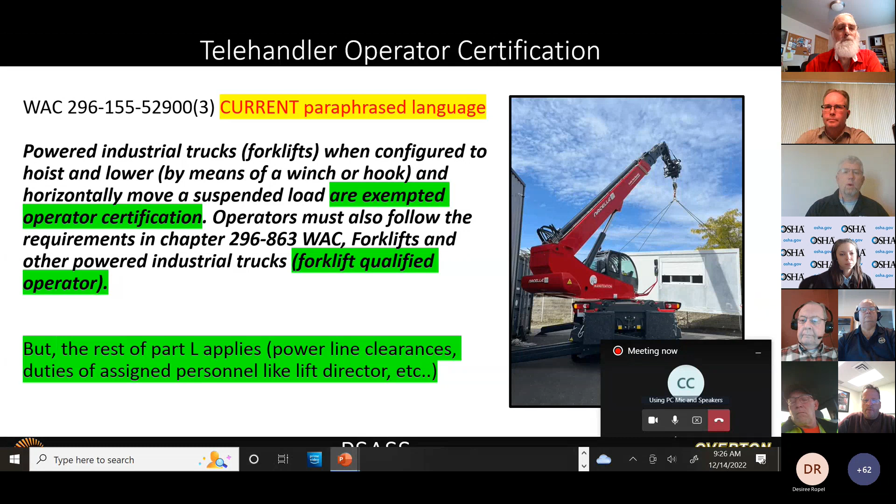The proposed language, and for a couple of years now we've been batting this around, is that power industrial trucks or forklifts, when configured to handle and horizontally move a suspended load, are only exempt from the certificate of operation and the crane certifier accreditation. So presently, your cranes have to be certified through an accredited crane certifier, et cetera. That will still not be required per the proposed language.

However, you need to see the appropriate WAC, which is the 53300 rule, which I'm going to show you in the next slide, for operator qualification and certification requirements, as well as powered industrial truck. So we've got this power industrial truck standard that applies generally as a core rule, right? It's an 863 standard that applies to all industries. And then we've got our 155 Part L proposed language here that will require certification, because there is no quote unquote exception for operator certification.

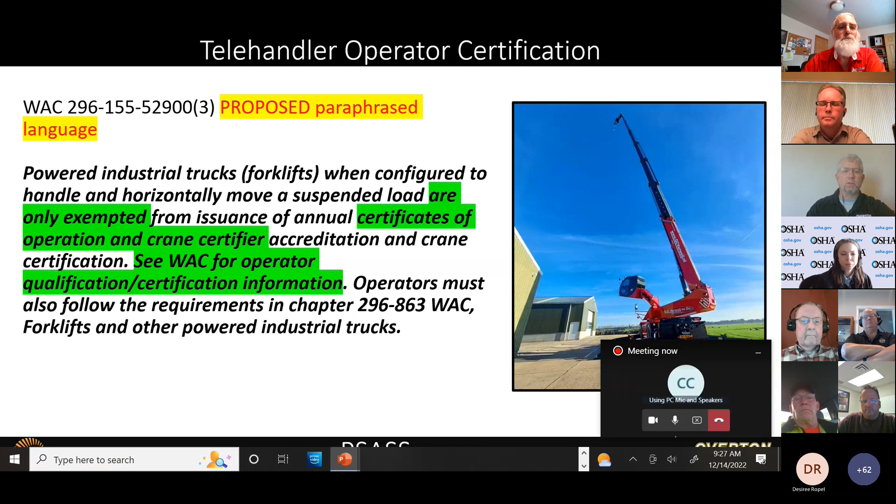So here's the proposed language under operator qualification. Prior to operating any crane or equipment covered by this rule, with the exception of the operator in training, the employer must ensure that the operator meets the requirements of operator qualification and certification. And at this point, I just have to point out the term certification is a term that applies to an accredited testing organization testing the competency to meet the minimum level of knowledge and skill as a competent person.

It doesn't eliminate the qualification side of things. Qualification is still an employer-based obligation to ensure that not only does that person have the credential, i.e. the CCO card or the CCR card, or well, really that's about it now. I think OECP, the operating engineers, still have an accredited program. And there's also one other one based out of Idaho for electrical workers that is accredited, but it doesn't include this telehandler at this time.

So an accredited certification, in addition, the employer is required to complete the qualification. That is an evaluation of the operator setting up the machine, configuring the machine, operating the machine in an environment that would be appropriate or relevant to the environment that they would typically operate. That is still the responsibility of the employer. It's clearly spelled out in subpart CC. It's part of the new proposed rule.

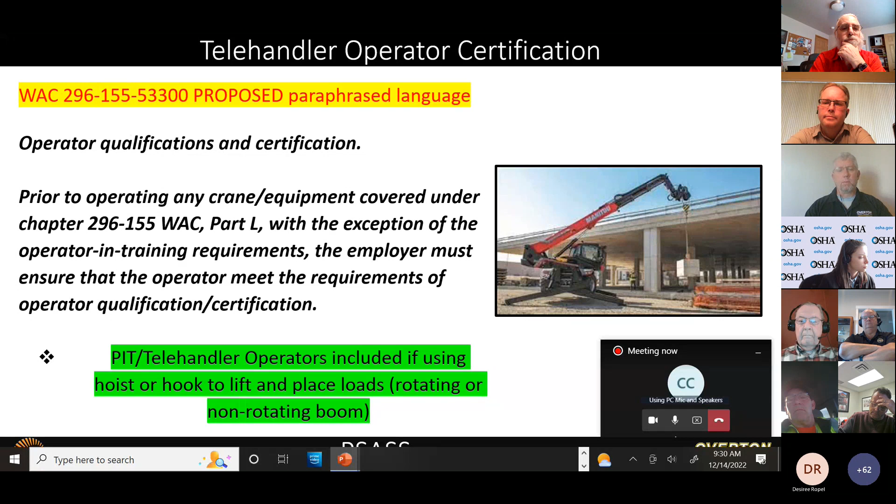So this is basically what it says here in the proposed language. Now, Bill and I were just talking about this before the call. Operator qualification must be applicable to the certification that is applicable to the machine type.

Presently, as of today, there is no accredited organization that offers a telehandler operator certification program, or even an accredited forklift operator certification. Therefore, the crane certification for the appropriate style of machine would satisfy the requirements of this paragraph. However, now there is an accredited program, or there will be—January 4th is the live date for the written exam. Once that program becomes effective and available, the guideline is that the certification must be appropriate for the machine that's in use.

So my question was, if somebody already has a mobile hydraulic crane certification, does that qualify them for the telehandler? Well, by the language in this statement, it does not. It must be most similar, and the certifying agency is going to determine that. My boss, Ron Overton, is on that task force or management committee that decides which machine type falls under which certification classification. Presently, a telehandler forklift would fall under the appropriate mobile crane certification, but that's not going to be the case moving forward since there will be a certification available.

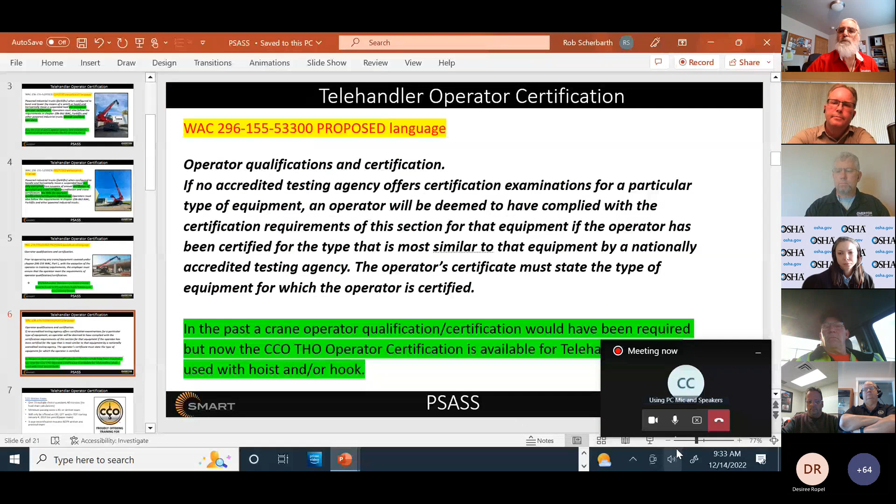Rob, Jason Hagquist has a question. Jason, if you still have that question, please let Rob know. Yeah, go ahead and shout it out because for some reason I can't see my chat box. So if you could just shout that out, that'd be fantastic.

Oh, no problem, Rob. Hey, so I got a question. So you said a hook and a winch—what about a shackle? You know, we do have some telehandlers out there that do have shackles and not a hook. Correct.

On a technicality, I'm not going to make Bill get off of his paternity leave to answer this question, but that is a nuance that would not meet an exception, as per some of the conversations I remember having. If it's an attachment point on the machine being used with rigging, as opposed to the fork being used for a palletized or forked load, then it would fall under the rule.

And I think you guys saw those pictures I was showing as I went through. There's no doubt—you throw a winch on there. This thing actually has a luffing jib where you use the tilt feature on the machine to luff and move the hoist up and down or the jib up and down. There's no doubt that is being used as a crane in this configuration.

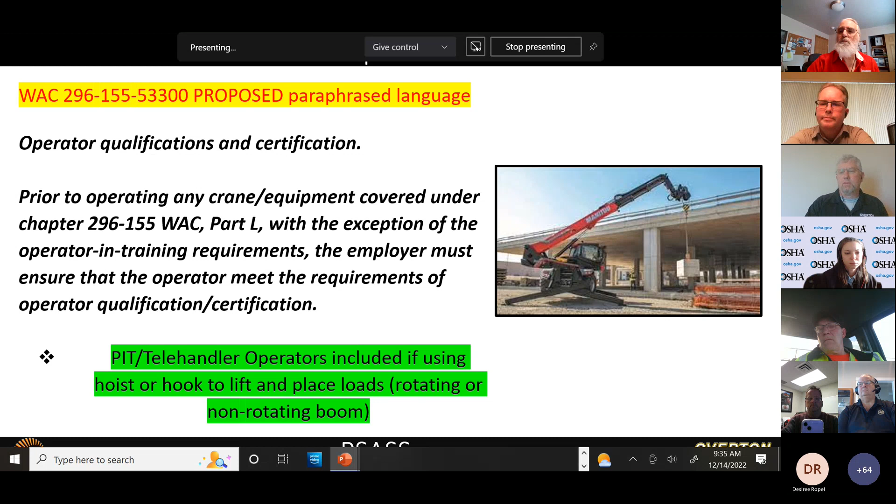This one's pretty cool, it's got that elevated cab. But with a hoist, with a hook, with a shackle connected to an anchorage point, the point is the machine is being used and configured to lift and hoist, or hoist and lower loads, and can move the loads horizontally.

Technicality, but I think I can speak to that too, Rob, if you'd like, real quick. Are you willing to? Thanks, buddy. I'm holding a baby, though—I'm going to warn everybody.

So the draft language will be changed to read: powered industrial trucks, forklifts, when configured to hoist or lower a suspended load like a crane, are only exempted from—and then I won't finish it. But basically, it was trying to clean up the intent that if you're using a forklift like a crane, we're not going to get down to whether you're hooking a shackle to anything or rigging over the forks, whatever. If you're using it like a crane, it'll apply.

All right, I'm gonna get back off. Perfect, thank you very much, Bill. Any other additional questions on rules and regulations before we move on to the specific certifications?

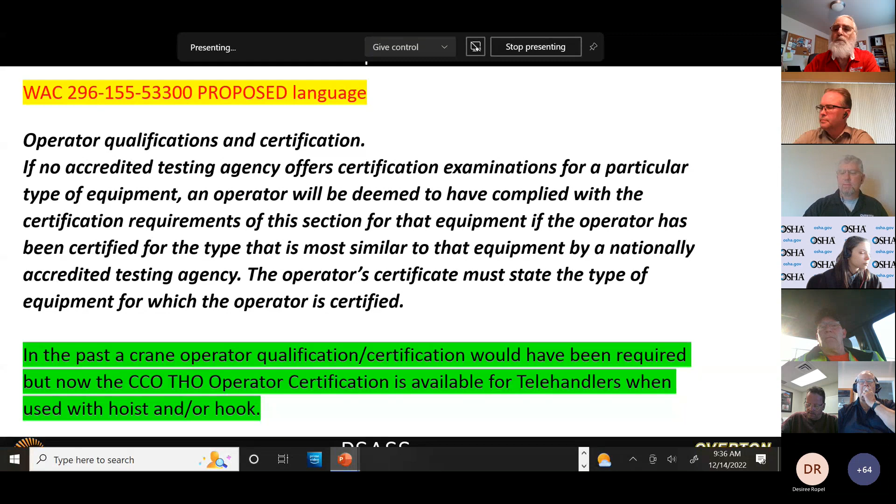Rhett, thanks for letting me know. If you see a hand up, let me know. For some reason, my screen isn't showing me that chat box.

All right, let's move on. I did mention NCCCO is now CCO. It was NCCCO for nearly 30 years, but they've rebranded, retrademarked to CCO. I do have permission to show this and to talk, not on their behalf, but as a proud offerer of their training program for CCO certification. I got to clarify that CCO does not train, CCO tests.

The accredited testing agency has developed an exam specific for telehandler, in fact it's called the THO certification. Within the THO certification, there is a rotating THO certification for most of those machines I've shown you up to this point, and a non-rotating, or what we would refer to as a fixed. I've got some more pictures and explanation about that.

This particular program, very similar to some of the other smaller machine programs CCO offers, consists of only one written exam. Unlike the mobile crane where you'd have to take a core test plus a specialty test for each appropriate machine, there is just one 70-question multiple choice test. You get 60 minutes. There's no load chart calculations, although there are some load chart configurations where you have to determine position of the boom or position of the load and determine an appropriate position on the chart.

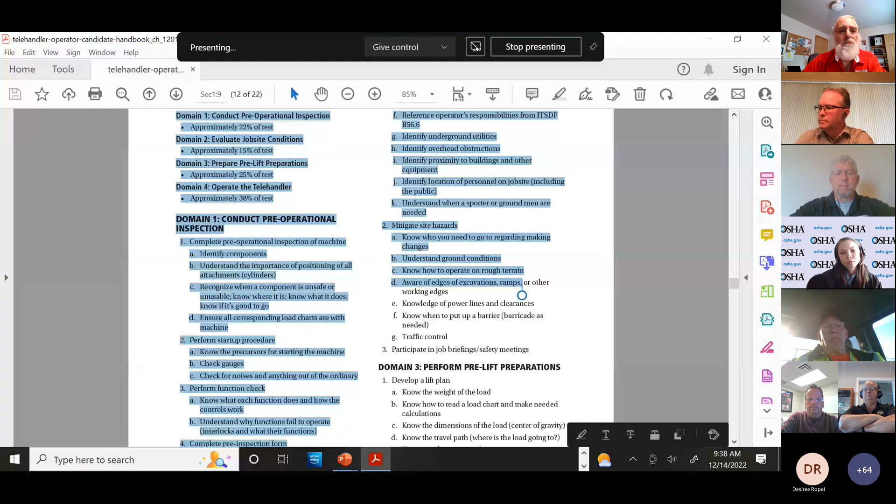Each CCO exam is created based on what the knowledge requirements would be for that operator to be considered minimally competent. So this core test consists of domain 1, which is pre-operational inspection, 22% of the written exam. Domain 2, job site conditions, at 15%; pre-lift preparations at 25%; and operations at 38%.

For those not familiar with the CCO process, all this information is available on cco.org under the appropriate certification. So there's no reason for somebody to come into a test unprepared, because this is an outline of the exam, essentially. These are all of the things, all of the required knowledge required for a minimally competent operator.

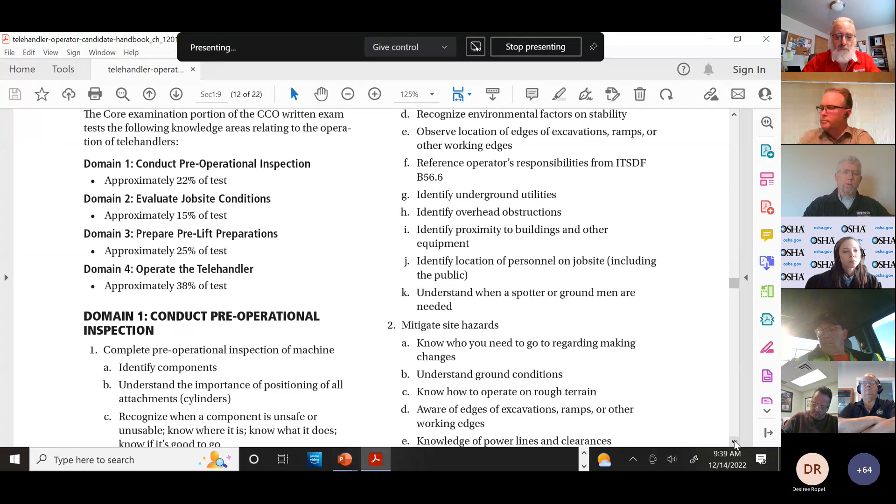So the score is going to be based on the performance within those 4 domains, and it's scaled. The reference list used to develop the exam includes the ASME or ANSI standard for the telehandler rough terrain forklifts, which is B56.6, a fairly modern edition, the 2021 version. Over here, the OSHA regulations that were also used include 1910-178.

And you're going to see that had a big impact on this, because presently, under subpart CC and under the WAC, crane operator certification is a 5-year certification. However, 1910-178, or in Washington 863, requires reevaluation at 3 years. This particular certification is only a 3-year certification through CCO.

At the end of the time period, or within the time period, not only do you have to take the written exam to recertify, you also have to take the practical, the hands-on exam. This is, I think, the signaling the only other one that requires a practical exam as recertification. So that's a pretty big impact on this.

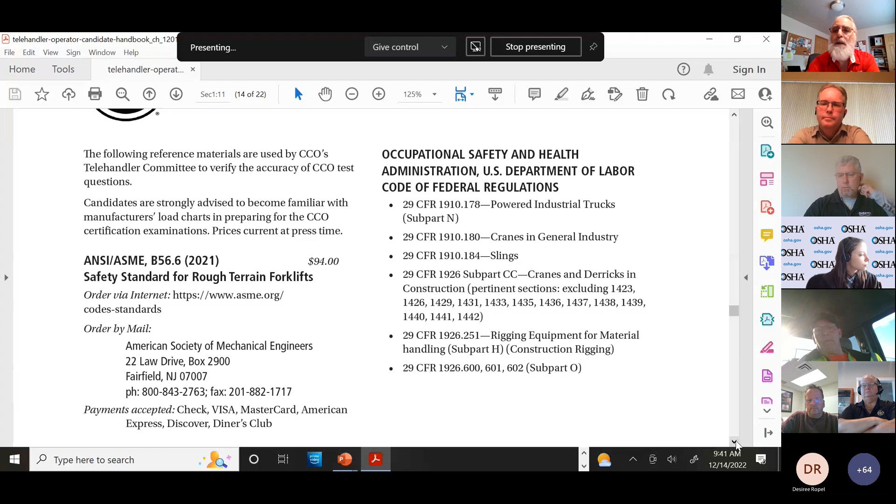It includes the 1910-180 general industry crane standard. Slings, of course, have to be covered. Rigging has to be covered because of the suspended load situation. Federal OSHA subpart H, rigging for construction, 251, and then there's an equipment operations section, or machine section, in subpart O of OSHA as well.

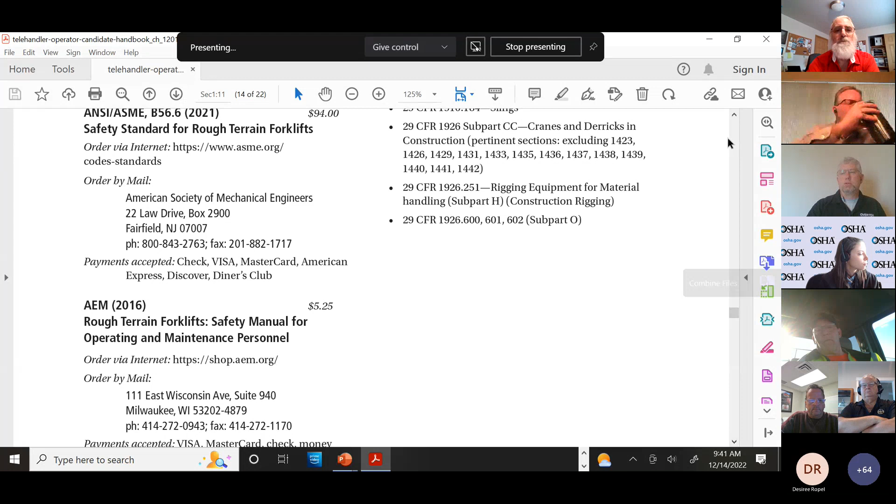Rob, you accidentally went on mute.

There we go, sorry about that. I know sometimes hitting the space bar or whatever will put you into a weird spot, but I must have hit a button.

Thank you, sir. I'm not sure at what point you didn't hear me, Bri. It was brief, Rob, but okay. That black box in the lower right-hand corner of your screen, if you could minimize that, that'd be great. Thanks, perfect. Yeah, that's why I can't unmute.

I do these classes all the time on this. For some reason, it's not working.

I appreciate that. Because this is one of the newer programs being offered, the decision was made to never create what we call a pencil paper exam for this program. This exam will never be offered to the public as a fill-out-the-bubble-sheet, read-a-written test in a proctored environment. All testing for this program has to be computer-based, either at an existing computer-based site after application.

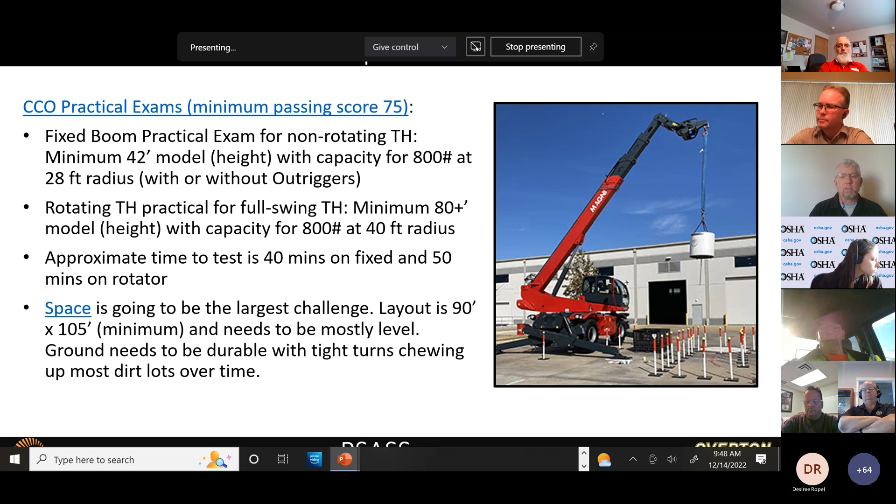Contrary to what people are gonna accept or like, that hook will not be able to be used for the practical exam. We have to be able to attach or use an attachment as part of the practical. So an attachment to either replace the forks on the carriage or to slide onto the forks must be used for the practical exam on these fixed telehandlers.

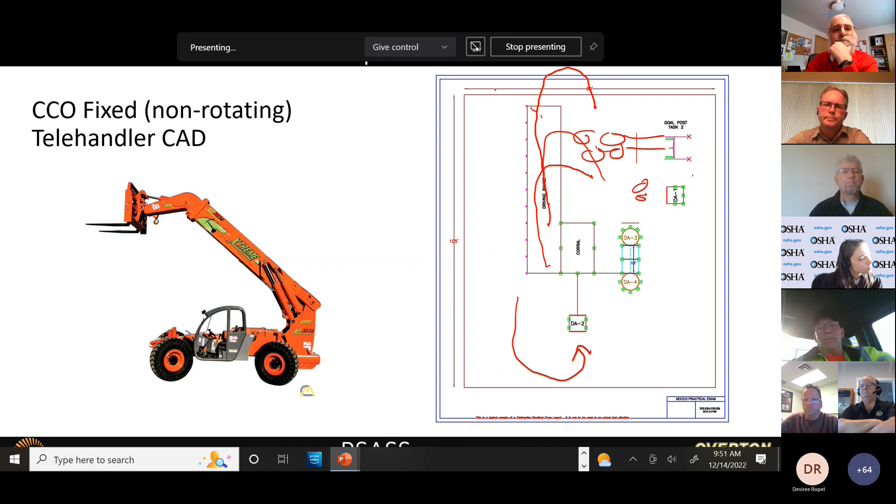And the task is simply to pick up the load with the chain over the hurdle, touch the chain to the ground, over the hurdle, touch the chain to the ground again, over the hurdle, and place the load within the perimeter of the barrier, doing it one direction and then coming back the opposite direction. It's a pretty decent challenge, doing it quickly, within time, not knocking over the hurdles, which are just literally 1-inch PVC tubes sitting on top of a small notch. The chain has been shortened for this task, so it makes it a little bit more challenging, and there's definitely some depth perception challenges with this particular test.

Now, the thing about the fixed telehandler is if you take the practical, there's only one written test. If you take the 70-question test, if you happen to pass, you take the fixed telehandler practical exam. That is all you're certified to operate as a fixed, non-rotating telehandler.

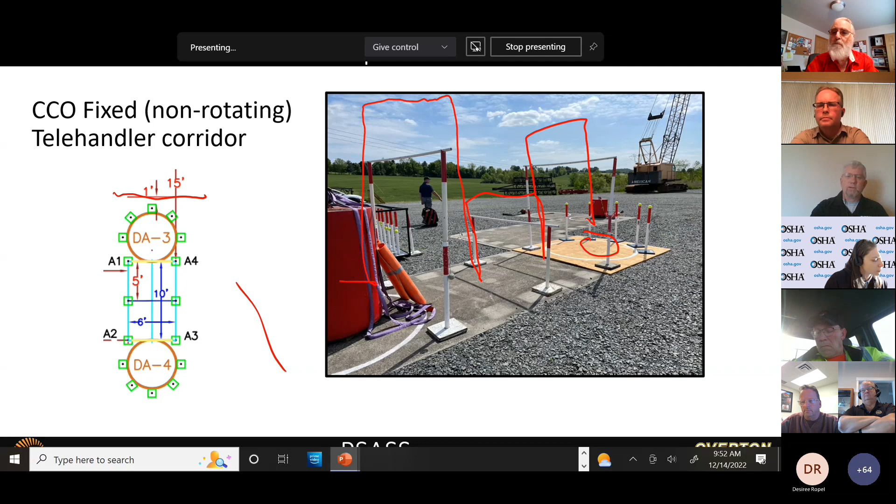However, if you take the rotating telehandler practical exam, the course looks pretty similar. We just added a little bit of length to the course and forced the operator to swing and maneuver the load, which also covers the non-rotating telehandler. So one practical for the rotator would include the requirements for both the fixed and the rotating telehandler.

It's two tasks. First task is to pick it up and place it. Second task is to remove it and put it back down on the ground inside those poles. It's a fairly challenging task. It's a very light load. You have to be aligned properly. If you're twisted just a little bit, it's definitely not going to work, and you're going to mess the task up.

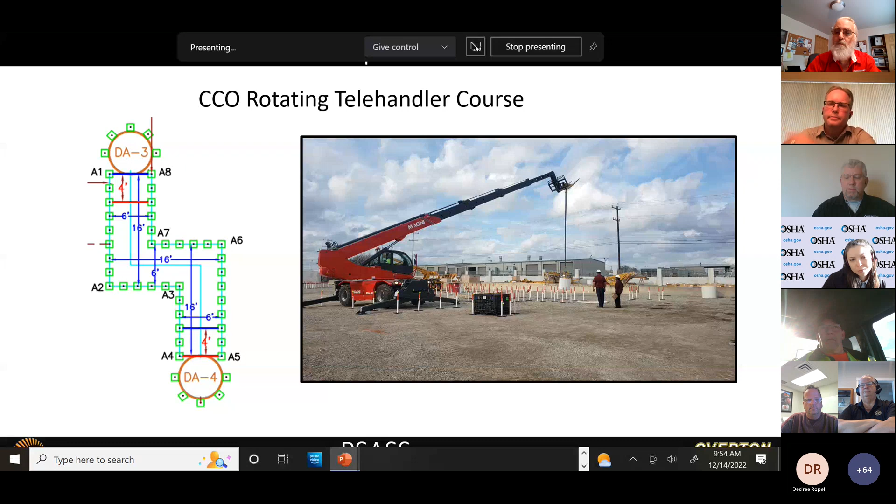And this is with forks, right Rob? That task is with forks. So this tube is sitting down here to begin with. You pick it up, you place it up on top, put your forks back on the ground. That ends that task. Then you come back up, pick it up, place it back down again inside of those pole bases there, remove the forks, touch the ground, and complete that task.

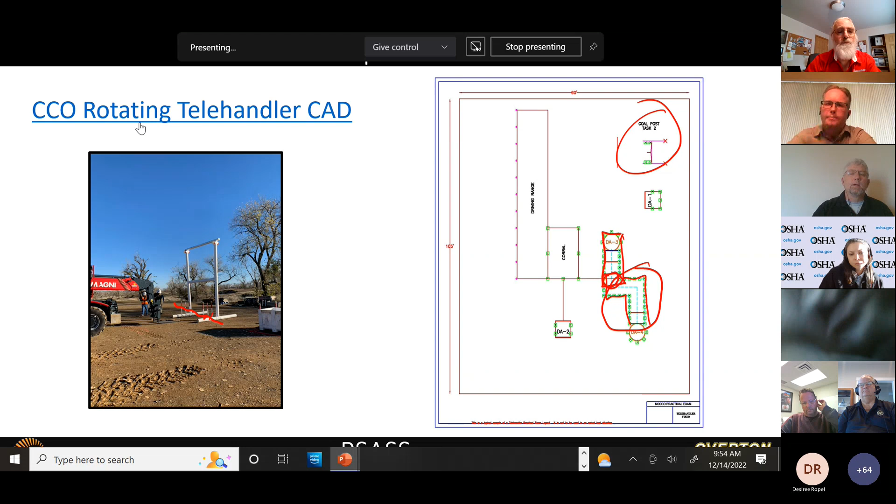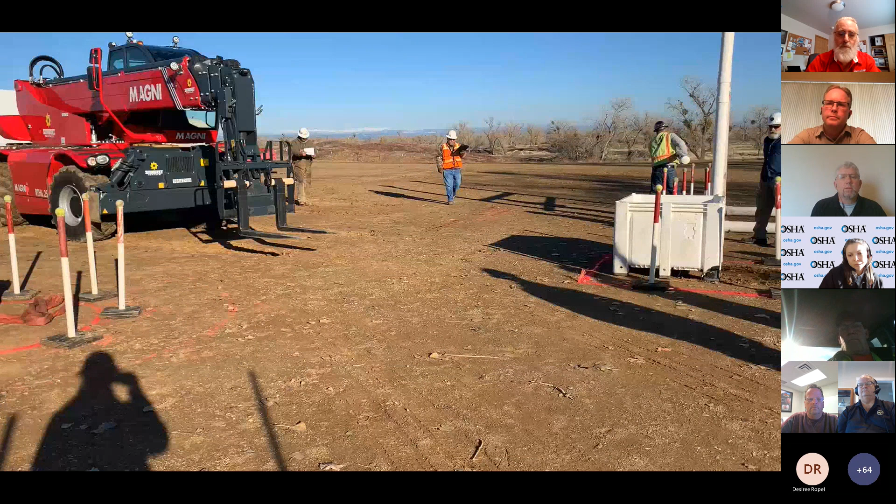It's about 2 minutes long. This is the stacking pallet task, done during one of the pilot events. You see he's carrying the tube in the background—that's the pole task in the background.

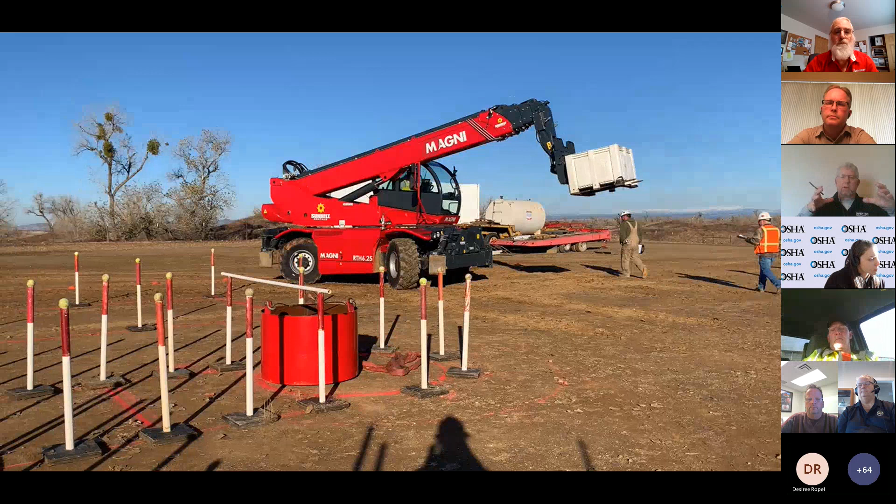This is the next task where you have to align the machine, pick up a pallet from a box. It's a 4-foot by 42-inch plastic pallet. There are some very specific standards on that for height, weight, etc. Pick it up—he makes a little bit of a mistake here by going back too far in the wrong direction, but you'll see he makes a correction, which is hard to see. On the far side there, you see those little orange cones on the ground? Those are discs you can buy for soccer practice, I think they sell them on Amazon as soccer cones.

Those are placed 6 feet apart along that 60-foot long corridor. So this task requires you to pick up the pallet, back up through the driving range. If you cross the line, you lose points. If you hit poles and bases, you lose points, etc. Then you stack that pallet on top of the other pallet. Once the pallet is stacked, the forks are removed, and that task is complete. You're also seeing in the foreground the zigzag corridor for the rotating telehandler, which is a bit of a tricky little process as well.

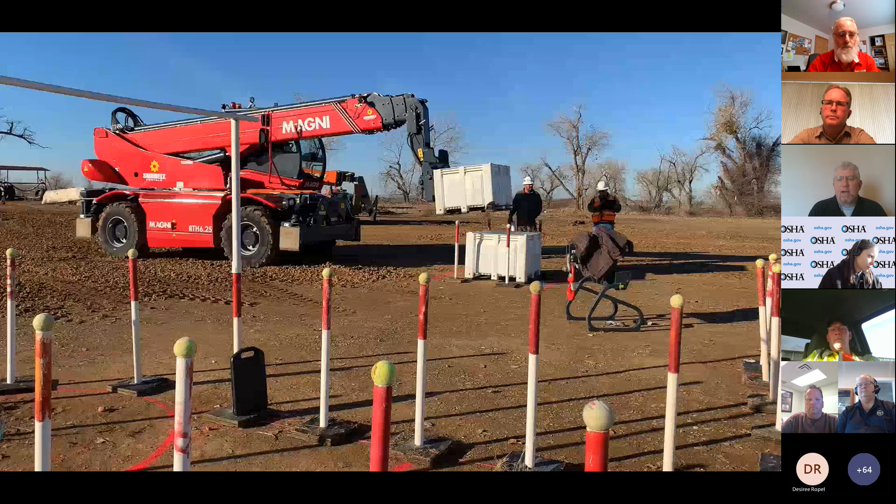So here he's doing the stacking task. This task does require those pallets to be interlocked. If they're not interlocked properly, there's a deduction for that—there's a guideline for that. At some point, I think he just gives up and sets it on top instead of interlocking. I believe I did the same thing.

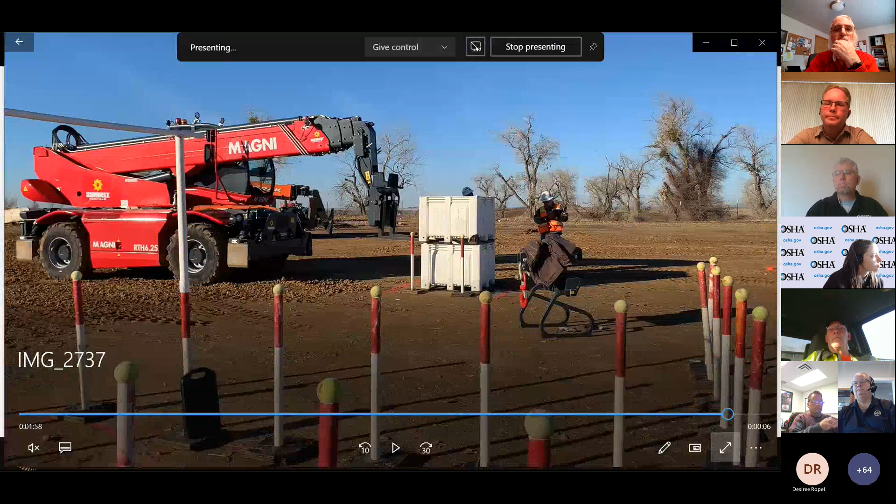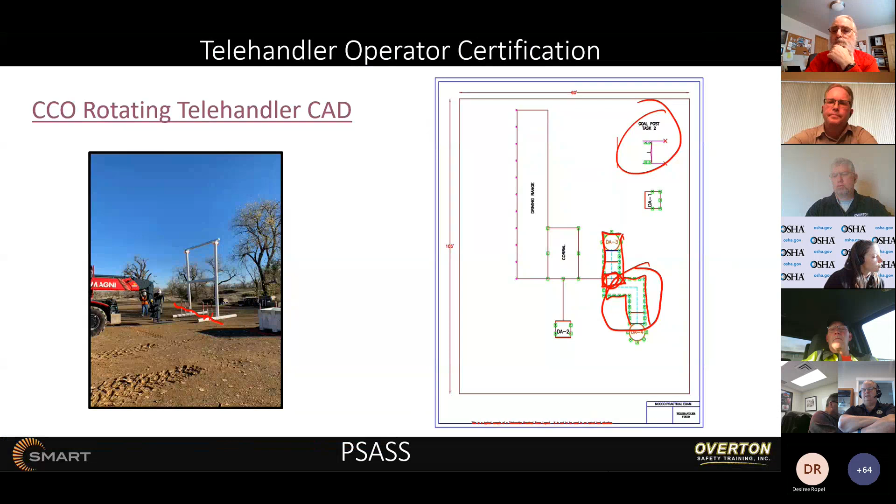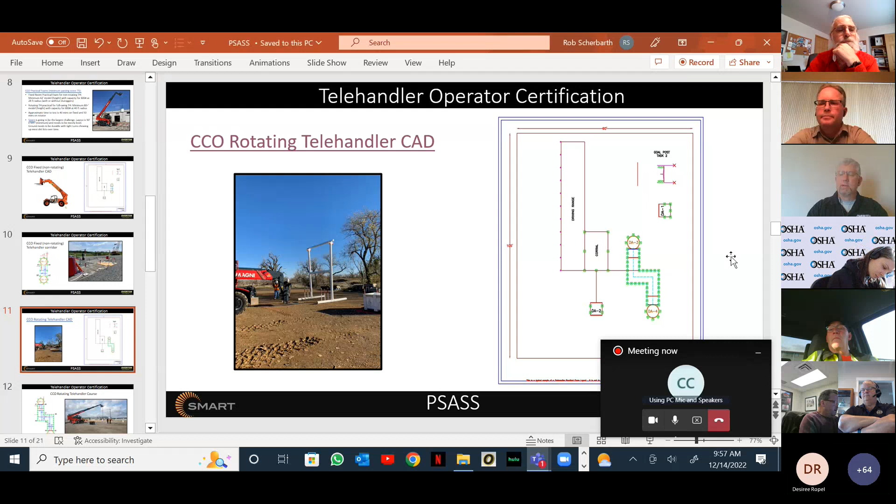Hey Rob, you're muted again. There you go. We lost you for a minute, Rob. You're muted. Hey Rob, we still are having a hard time hearing you. Check your volume, it looks like you're muted. Just click your microphone, unclick it, so we can hear you, sir. I hear you—for some reason whenever I switch screens, it's not working today. I don't know why. Should hear me now.

So what you just saw there was picking up from here, driving back, stacking, picking up both of them, driving back, placing one on top. And then the next task is to bring the machine back into the corral and extend the boom to place that first pallet back where it begins. Pretty cool little task—takes about 10 minutes overall, separated into segments of the test.

Rob, I noticed that he wasn't using the boom to place the load. Is that part of the operator's choice? In the telehandler operator's manuals, it states that they want you to place the load with the boom, not driving like a regular straight mast forklift.

Unless you're on level, flat terrain, which we have here, it's literally operator's choice. The last task, there's no choice, because to place it back in the DA2, where you see this one right here, you have to extend the boom to do it. We had operators that would park 40 feet away and use boom extension, and others that would drive right up into it, especially when picking. When picking, it's easier to drive into it. When placing, it's easier to extend and retract. So it's operator choice.

This is the zigzag corridor, very similar to the mobile crane zigzag corridor, except we added some complexity by adding some hurdles.

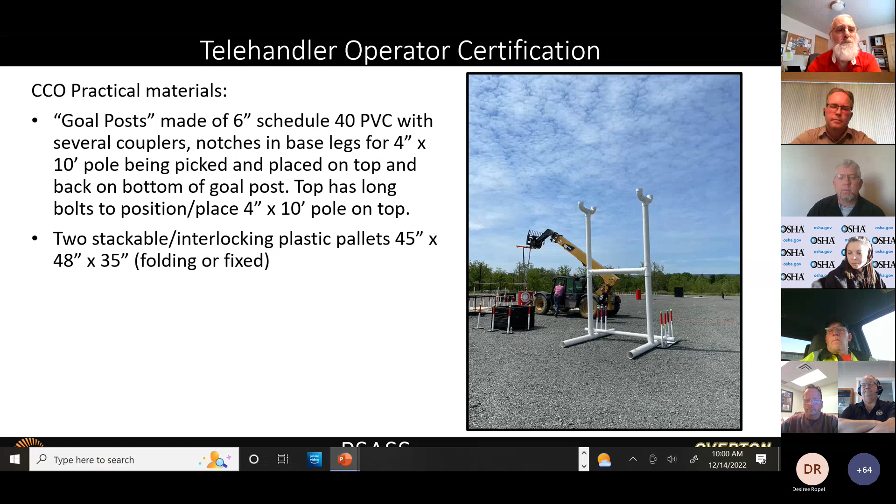That's the goalpost. The 2 stackable interlocking pallets I mentioned—you see one there in the foreground. This particular one's black; the ones you saw in the video were white. As long as they meet the dimensions and weight requirements and can interlock, they satisfy the requirements.

I mentioned this earlier, but even though the machine may have a hook attachment or a shackle attachment, as Jason mentioned, the task in the test requires the use of an attachment. It's not evaluated per se, but operating with an attachment is one of the required evaluations. Therefore, we have to install and remove the attachment as part of the process.

In this case, it's just one of those 6-ton Vestil slide-ons, attaches to the fork, attaches to the backrest. It's got a load-rated hook, primarily used for any of the machines. Some of the Magni options down below include a hoist, just a regular hook attachment, or a little luffing jib with a hoist. Any of those attachments can be used as long as there is a hook or shackle connection point that is an attachment to the machine.

Even a truss boom can be used. We did find with the fixed telehandler that using a truss boom that's too long makes it very difficult to get into that first circle where you start and begin. So a short version would work okay, but you're going to have to use a lot of tilt feature to use that attachment—but it has to be an attachment. So when we select the machine to be used, we'll either select to use an attachment that requires removing the existing forks and adding the attachment from the carriage, or adding the attachment to the fork.

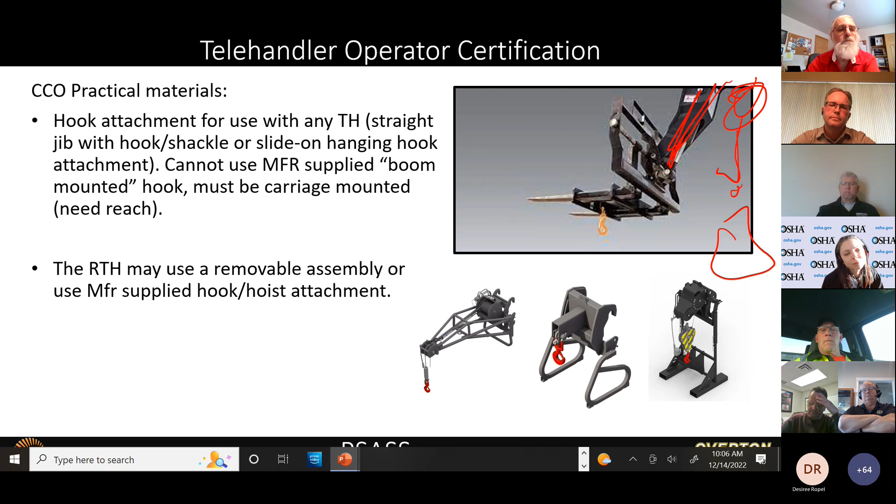The standard we decided upon was the only thing we could universally allow based on everything being the same. Remember, that's the thing about a certification exam - it all has to be consistent. So using a carriage mounted or fork mounted attachment was the most consistent way to do it, as opposed to the boom head attachment or the boom head hook.

Any other questions on the practical or the CCO certification for telehandler operators?

I have a question. Again, I've got a video I'm going to show you at the end here. Yes, go ahead. Yes, I'm Dan Cabot here. We have forklift operators that are only class 4, sit-down counterbalance with a fixed vertical mast that need to move around objects using a hook attachment, like in a garage setting where they're below ground, and have to move longer materials through narrower openings. How are we able to get the similar certification? Do they have to learn telehandler operation before they can even get certified, or are you going to have something for these type of forklift operators?

I'm going to go back to this. There is no accredited certification for a non-telescopic forklift presently. Maybe someday there will be, but in this case, there is none.

So in that regard, is that a construction-related activity or not? If it's construction-related, then 1926 Part CC applies. Therefore, this statement would be the most appropriate. In this regard, the employer would have to determine by contacting the certification agency which machine or which certification classification would be most similar to this. Would it be the telehandler, which you're right, it's a completely different skill set? Would it be a mobile crane? Totally different skill set.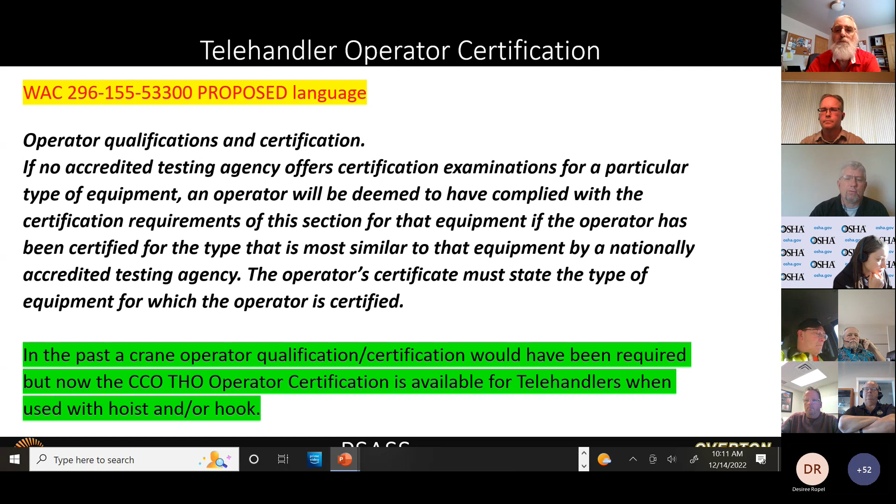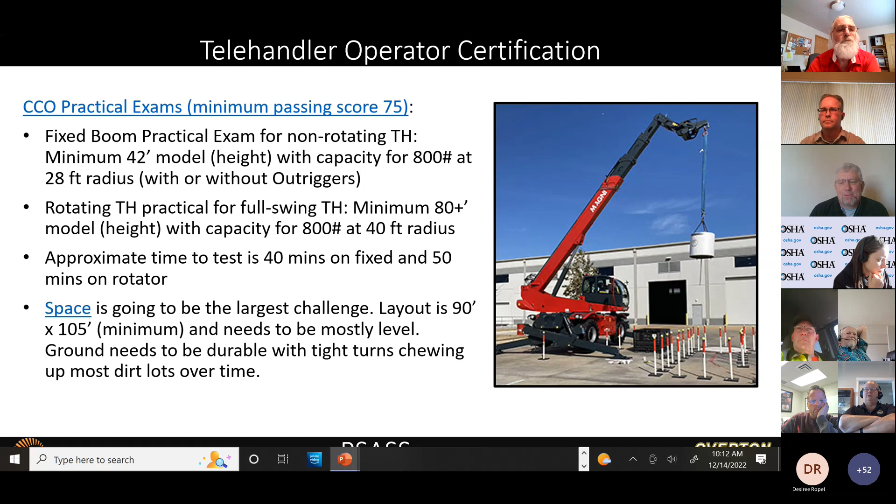Rob, can you address the technical skill set and aptitude requirement to successfully navigate this course? Because we test a couple thousand people a year for CCO on cranes, and we get all manner of experience. We get people that have never sat in a crane, and employers send them off to go get nationally certified. It just doesn't work like that. It's a skill set that requires some touch and experience and seat time.

And Rob, you took this exam yourself, and you're a very adept crane operator, multiple certifications on all classifications, and have run telehandlers and straight mast machines for a long time in your career. Can you just address to the group the skill set requirements to be able to successfully navigate this course?

Yeah, absolutely. From a fixed telehandler or a fixed machine, I can tell you I'm not going to say easy, because it's challenging. Anytime someone's holding a stopwatch and timing you to perform a task, it's challenging. But the sight lines and the operator controls for a fixed telehandler have been universally the same for as long as I've ever seen one, 25, 30 years. Meaning the right-hand joystick does what it does, it booms up, it booms down, it extends, it retracts. The left-hand joystick is non-existent.

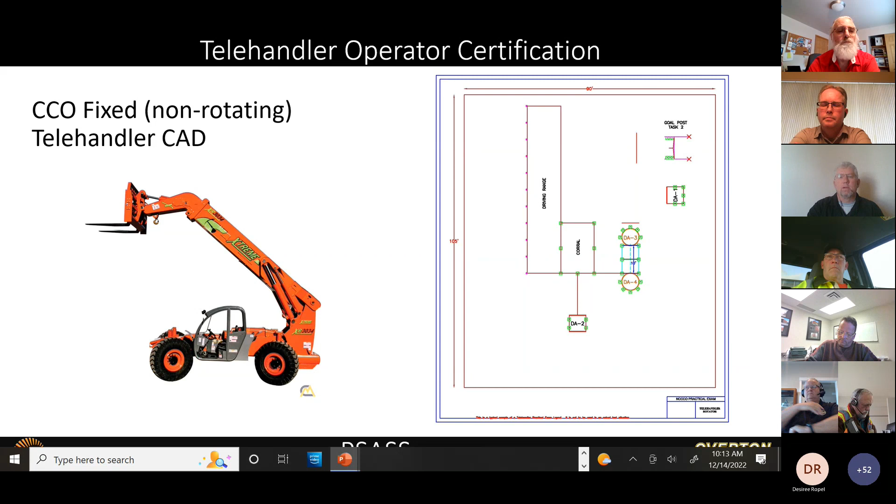You start pulling in one of these rotating, so I think the fixed machine is, I'm not going to say easy, but it's definitely true that an experienced forklift operator will have no problem whatsoever going through the telehandler operator certification for a fixed machine. Now you add the rotating. That's the key word though, isn't it? Experienced telehandler operator, correct?

Absolutely. Okay, now you add the rotator to it, and James, you've done it. I'm sure, Jason, you've done some familiarization. I've done a ton of familiarization on these machines. Manitou is now the Magni. JLG has one that Dieci had built, and now it's a JLG. JCB has one now. But I've noticed on every one of the machines, they've changed the joystick configuration.

And this is one of the things that bit me for the first time, almost bit me bad: the right joystick now still controls boom up and down, but it also controls tilt in the in-and-out direction, the lineal direction, versus the boom up and down. And the left-hand joystick is what controls your boom extension, retraction, and your swing. That was a very, very challenging thing to overcome, because the automatic telehandler operator mentality is to be able to boom up, boom down, boom in, boom out with the right joystick. And that is not how any of these rotators are configured. Not to mention you start throwing the swing element in there where your left hand is going laterally instead of anything else. It's very similar to a crane in that regard.

As a crane operator, experienced certifier and examiner, several of us at the event completed the exam with crane skills and telehandler skills. I can tell you, I barely passed the thing. I went through all these workshops and got a lot of hours on the machine. There's a nerve-wracking element to it, a skill element, and a familiarization element. It's a challenge—this is a very challenging practical exam.

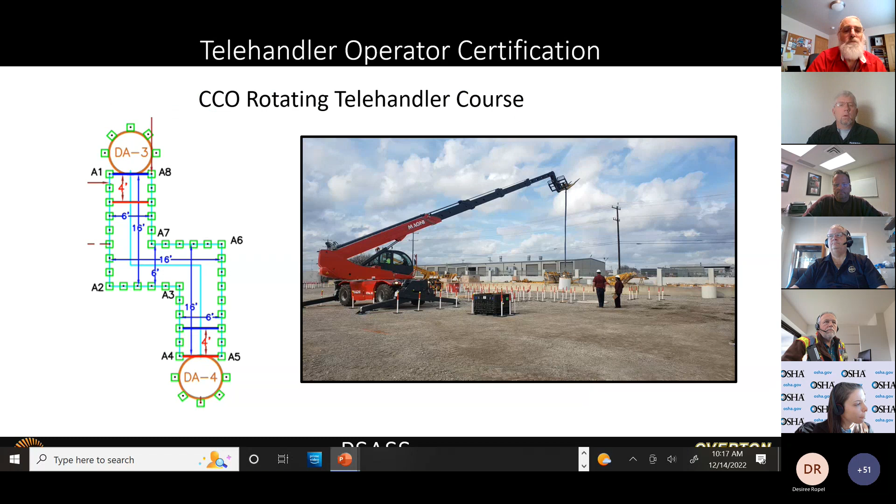So that was it as far as the presentation of the CCO certification. I do have some other things to point out. I mentioned CCO is now CCO—it used to be NCCCO, which was a mouthful. It still says that on some of their books, but they've abbreviated and trademarked the CCO logo.

I did mention that pencil and paper exams are changing over to computer-based events only throughout next year. By the end of next year—2023, I believe, John, correct me if I'm wrong—there will no longer be any pencil and paper exams offered for any of the certification programs. It will all have to be an event-based or computer-based test of some nature.

We, as practical examiners, are now called proctors moving forward, or invigilators, as the term applies. Our practical exams are going to transition to tablet-based—literally you perform an exam, sign the tablet, hit submit. Once we get Wi-Fi, we submit the batch to CCO and they'll get those results and exams quicker, able to grade and score them. It should be a fairly smooth process.

The operator certification—go ahead. Just got a question: through all this, the only thing you didn't mention is the 2,000 pound rule. Does this make this all moot, or is that gone now? Why would that affect the telehandler? I don't know a single telehandler that's not rated over 2,000.

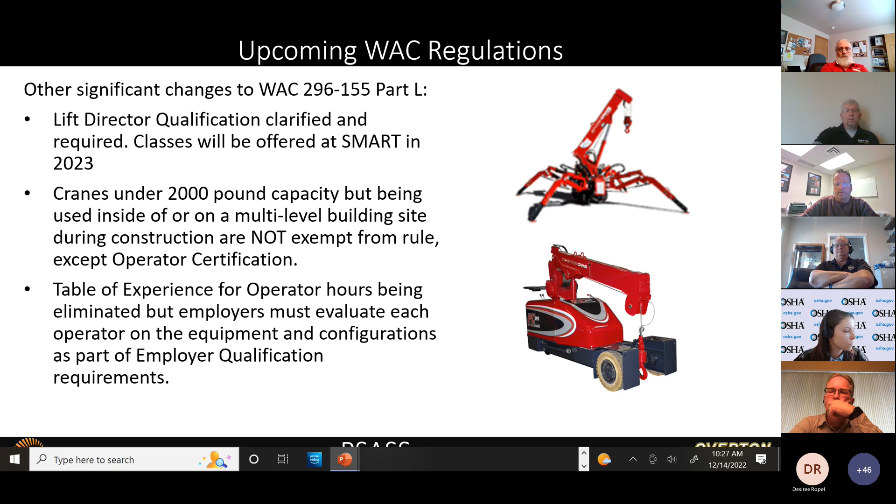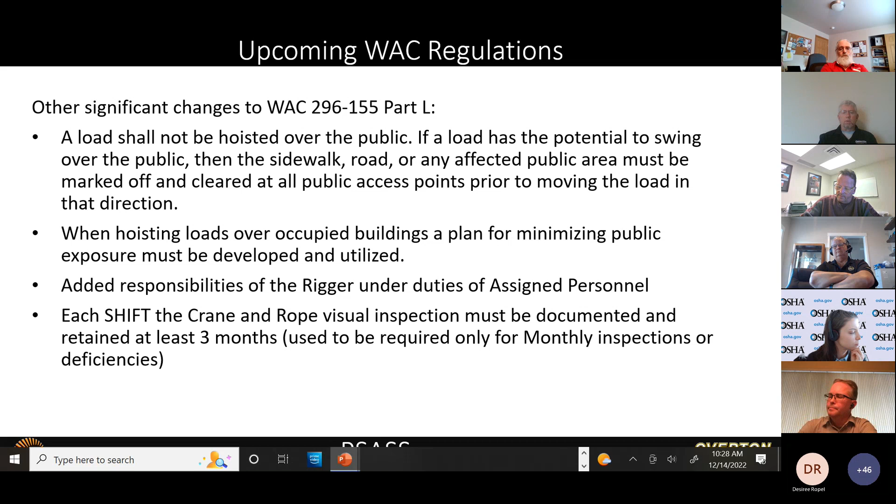One of the big changes I noticed, I didn't even notice it during any of the other reviews, but there's now a requirement in Part L for every crane shift inspection to be documented and retained. The OSHA regulation only requires that for monthly inspections. So I thought that was a pretty significant update or change.

And the last significant change is working near power lines. Thankfully, and you guys at FACE could speak to this, Bill, you could speak to this, thankfully you're not hearing of a lot of events or incidents where cranes in contact with power lines have resulted in serious injury, hospitalization, or fatalities, as many over the last 10 to 12 years as in previous years, because the guidelines have been expanded. The required clearances have been clarified. The requirements for control and marking, et cetera, have been clarified. So the rule already exists to include those additional requirements.

The one addition to the draft of the new rule includes the pre-lift meeting that's being done as part of the requirements. It must be documented and must remain on site for the duration of that machine being used on that site when that safety plan is in place for working near energized power lines. There are about 8 to 10 bullet points underneath this. I didn't include those, but there's a requirement of who, what, and when, et cetera, that's going to be required as part of the documentation for this lift plan.

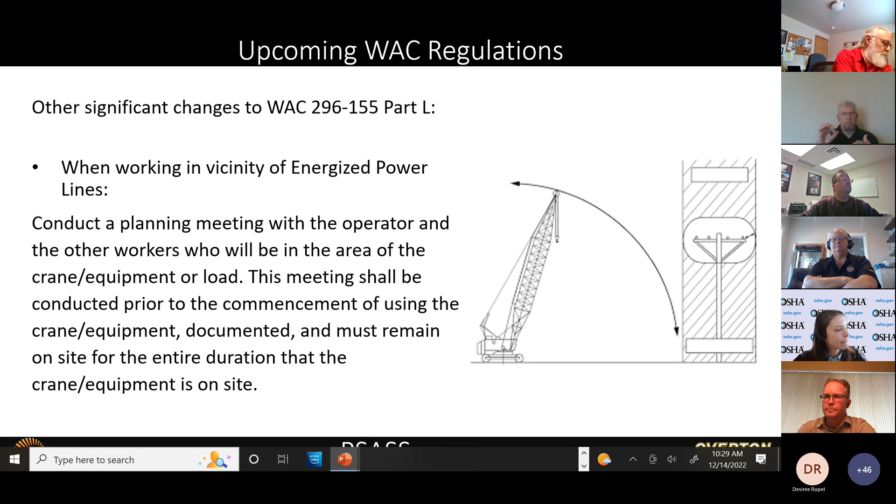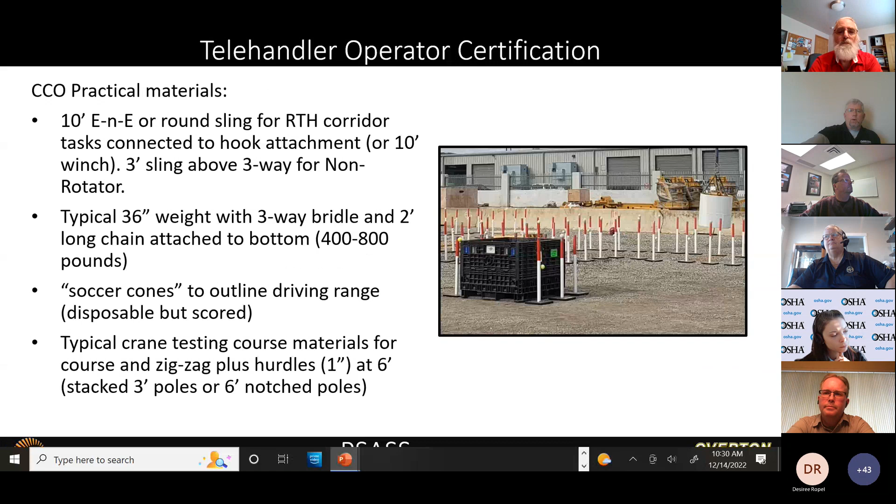Hey Rob, if it's okay with you and Ron, can you send me the PowerPoint? I will, yeah. Okay, Ron, you okay with that, I assume. So what I'd like to do, if you guys don't have, well, go ahead. If you have questions, please unmute, ask away. Otherwise, if you look, say again.